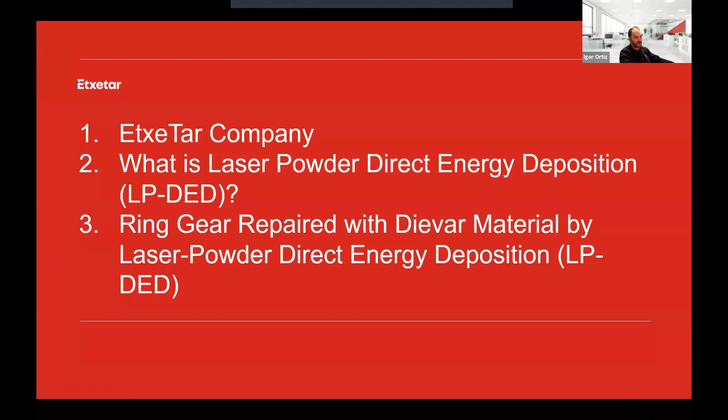This is a group of different companies, but I'm going to focus on just two companies, Etxetar and Ikergune. I belong to both of them. Ikergune develops laser processes, laser powder direct energy deposition processes, systems and technology that is deployed to Etxetar. They develop, commission and design machine tools, in this case for laser powder direct energy deposition processes for specific parts.

We are located in northern Spain, in Basque Country. We have three production facilities, two in a town called Elgoibar that are focused on subtractive processes or common machining of steel and aluminium parts. And we have a new production facility and laboratories specifically for laser powder direct energy deposition processes.

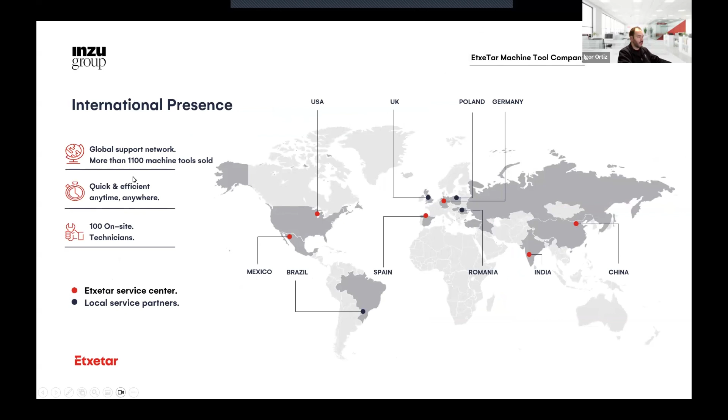We have a global presence. We have offices in Troy, Michigan, for more than 35 years. We have an office and service center in Mexico, in Germany, in India, and in China. The dark blue dots are local partners in these countries that we work with. We have more than 1,100 machines sold. We also have 100 field technicians, and this is our worldwide network.

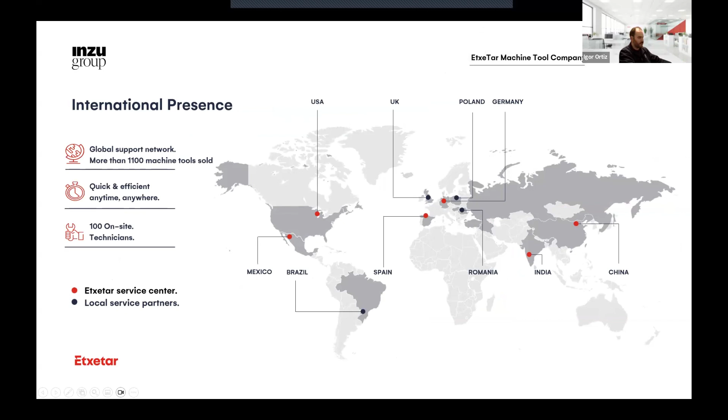Related to laser processes, Etxetar develops three main areas: laser hardening or surface heat treatment with dynamic variable spot shape and controlled energy density, laser cutting, and laser powder direct energy deposition or laser cladding.

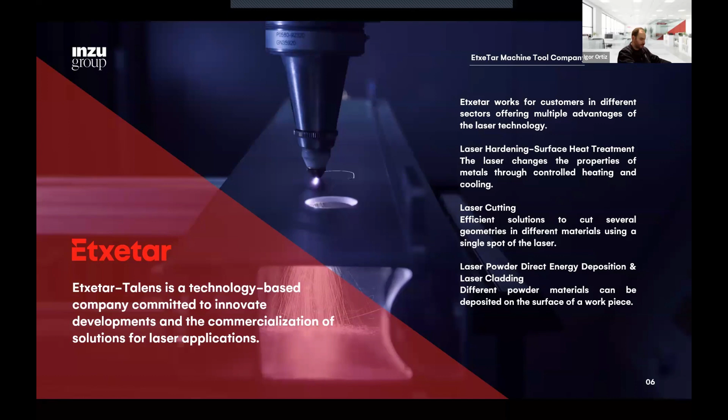So what is laser powder direct energy deposition? We use coaxial nozzles, discrete nozzles, but usually we work with coaxial nozzles that are two nozzles assembled together. Blown powder is injected through the nozzles, and a laser beam melts the powder onto a substrate. During the process there is a heat affected zone and a dilution, but compared to traditional welding, the heat affected zone is small. Also, we can control the track width and height in different materials using thermophysical powder material parameters.

In general, this process or technology is being used for surface improvements, wear resistant coatings, corrosion resistant coatings, and high temperature coatings, and also for repair processes: repair of parts due to wear, repair of parts due to corrosion, and high temperature coatings or parts working in high temperatures. Also, the technology can be used for near net shape manufacturing, for example this 2D geometry done with a CAD model, or for freeform manufacturing.

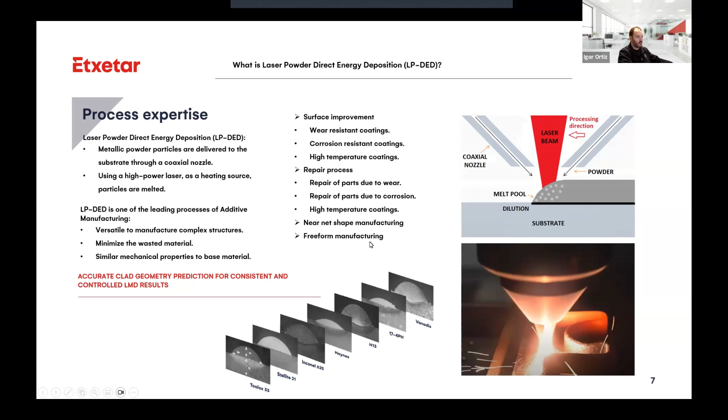So we do a lot of research in powder quality characterization. We look at different suppliers of powder, and we check each supplier and each powder to see if it's a good supplier. We want to avoid porosity in the powder, because in some materials like Inconel 718, this porosity is reflected in the tracks. Even if we have good process parameters, the tracks and the part have porosity, so the part is not suitable for entering service.

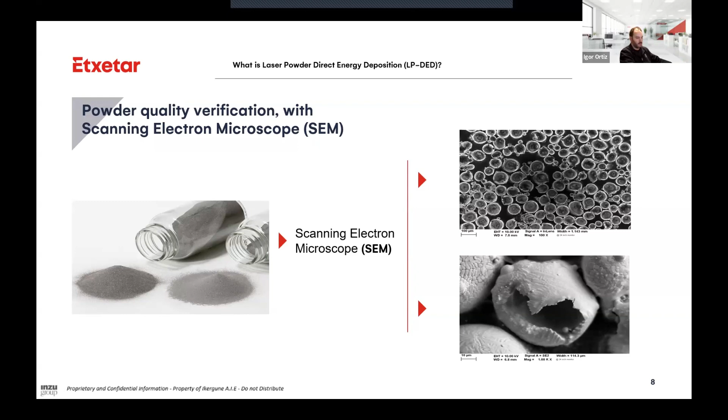We have researched different materials. We research the same material from different suppliers, and also check the quality of the supplier in different substrates, checking dilution, porosity, lack of fusion, and whether the quality is enough for the part itself. We have different powders under research, and other industries like energy, aerospace, naval, and hypersonics can be suitable for additive manufacturing or laser powder DED.

We have researched stainless steels, maraging steels, cobalt-based steels, nickel-based alloys, tool steels, bimaterials, and other high strength and specific powders, always checking the quality of the supplier and the process.

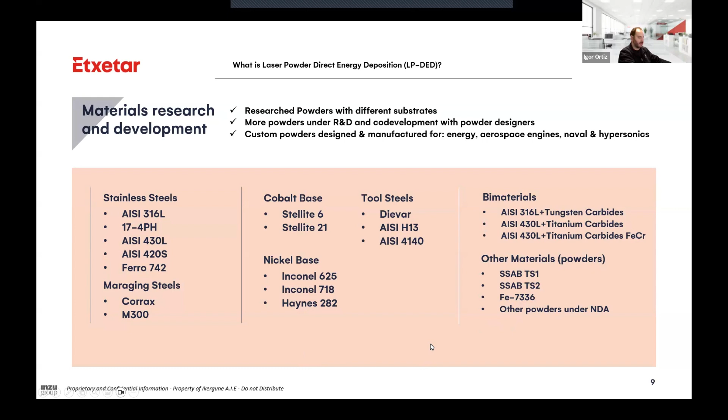We have our own metallurgical laboratories, a specific team that researches the powder, the quality, and the behavior with the laser. We check internally and also for projects and programs the quality that we achieve in our developments, using different tools and systems to check the quality.

How we do our research, or how we characterize the process: we start with simple tracks, selecting a specific powder. In this case, we have selected Dievar material for repairing the ring gear, and we run different tracks with different process parameters.

We check each track in the metallographic laboratory for porosity, lack of fusion, or any issues in the quality of the tracks. Once we have the height and width of the track, we select one track and its linked process parameters.

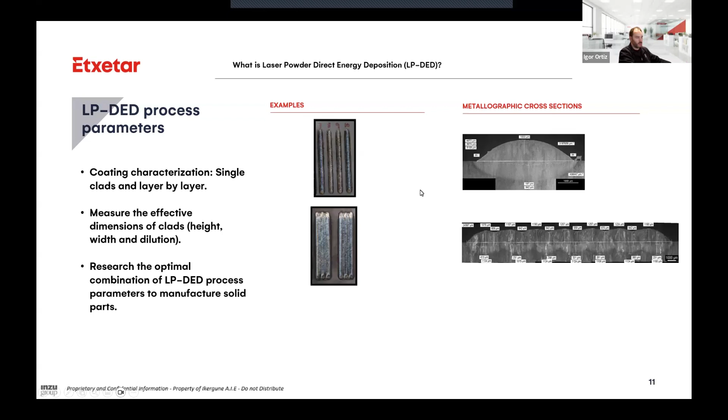We launch one layer coating and five layers in a prism or near net shape geometry, checking the dilution, porosity, lack of fusion, cracks, and any issues we can have in the single layer coating or the multi-layer prism.

Once we have checked the quality of the substrate with the powder in these three cases, we have a process recipe, which we save internally and also to our laser software for toolpath programming.

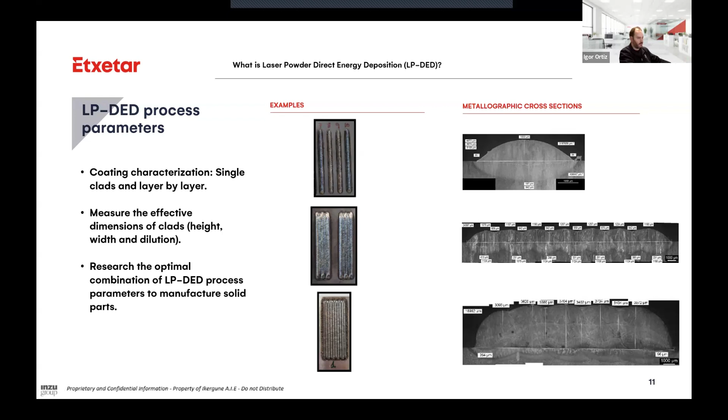In parallel or afterward, we check the as-built samples via cross section, using optical microscopy to look for any crack, lack of fusion, cross contamination of the powder, and porosity, assessing the behavior of the powder with the laser parameters in all our research.

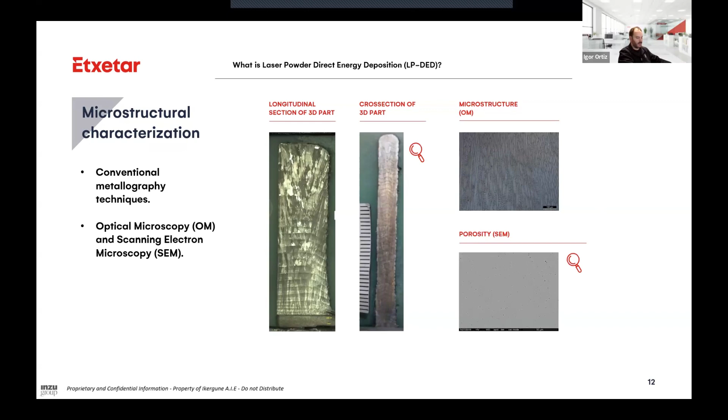We have made 4 blocks of AISI 316L. On one hand, checking 24 hours non-stop processing with a high power laser, demonstrating that we are capable of manufacturing and that the system is stable during a 24-hour non-stop process. We have commissioned the system and it works for long times, including the optics, cooling system, laser source, nozzles, and every item and tool involved in the laser powder DED process.

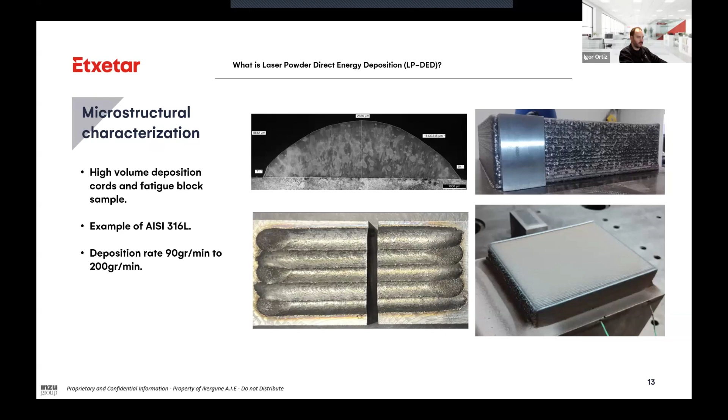In parallel, these 4 blocks have been used for taking samples for stress strain and fatigue curves that we are measuring in different materials, in this case AISI 316L.

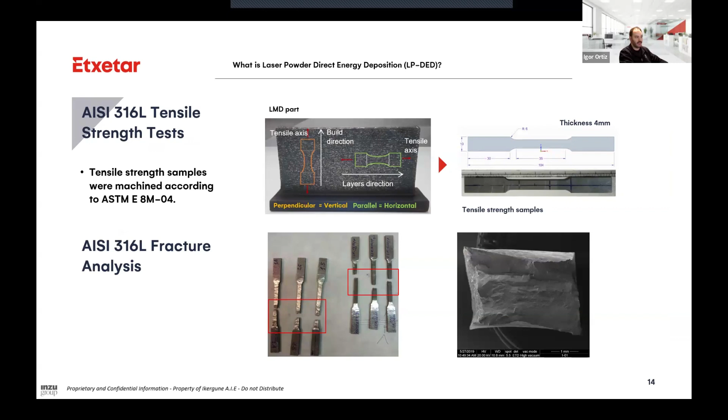Now I'm going to show two part samples that we have worked with in laser powder DED. One part is a wind power main shaft repair, where we had to preheat the material, 42CrMo4, to avoid cracks with the powder being cladded, in this case Inconel 625. Without preheating, the 42CrMo4 material can develop cracks during the process.

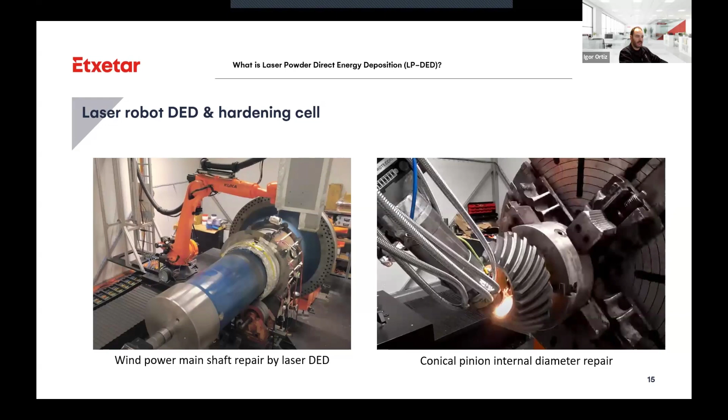Another type of part we have repaired, developing the process with one of our customers, is the internal repair of a conical pinion. Currently, different types of shafts and conical pinions are returning to service after this repair process.

Our goal with Penn State University's Gear Research Institute, with Aaron and his team, is to develop know-how on the fatigue behavior of gears loaded with different loads, and to use this information. Our goal is to repair, coat, and manufacture gears or gear teeth by laser powder direct energy deposition.

This gear is an example of toolpath programming, showing that we are able to control the toolpaths, the powder, and the material to build near net shape gear tooth geometries. From the Gear Research Institute, we are taking the fatigue curves in Dievar material.

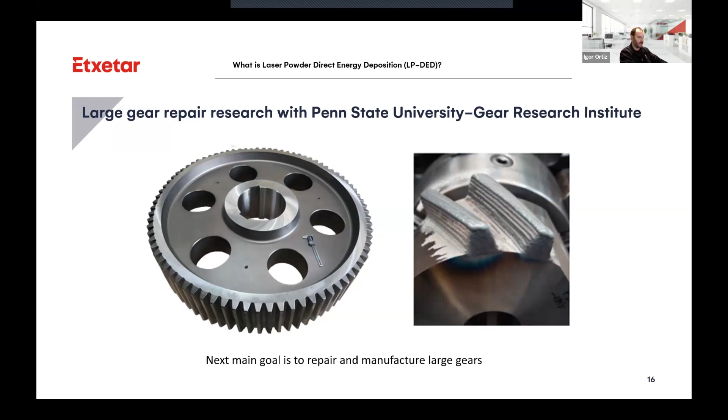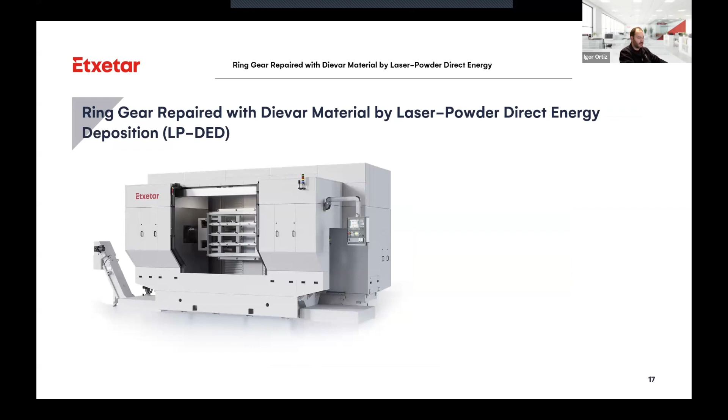So this is our case: an X-Flex machine tool from Etxetar. This machine tool has 6 spindles. The part that has been broken is a geared ring that moves this spindle horizontally.

The gear ring was broken due to a shipment issue from a supplier. There were just two possibilities: to manufacture a new ring gear or to repair the damaged gear teeth by laser powder DED.

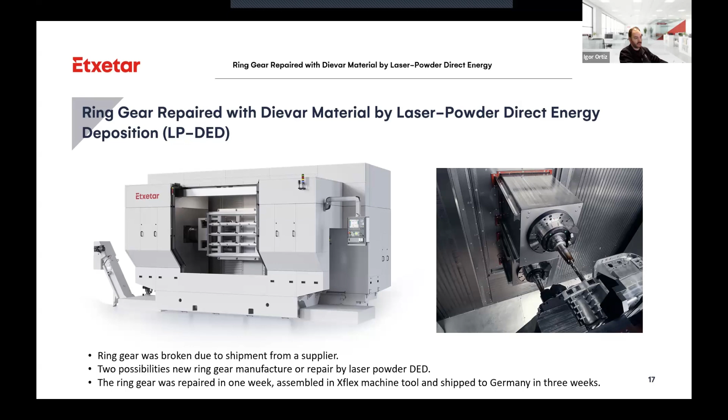Internally, Etxetar told us to repair by laser powder direct energy deposition. So we take the gear, because this gear, or this machine tool, has to be shipped to Germany in 3 weeks.

This is the damaged ring gear. I can't show the drawing, but the dimensions are between 700 and 800 millimeters in diameter. This is a broken tooth in the gears due to the shipment that has been broken.

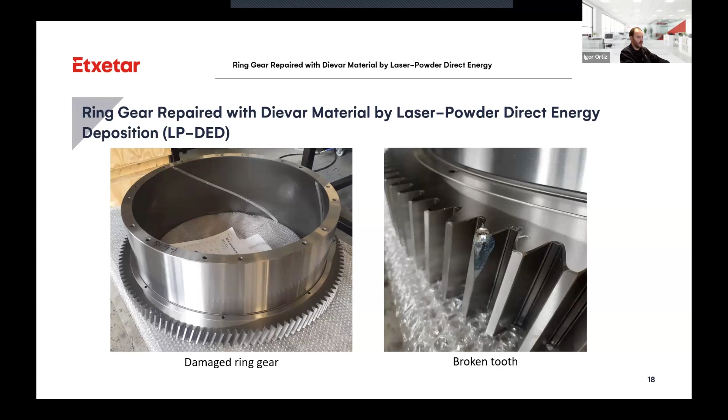To take the repair process with laser DED, we previously studied the material behavior with Dievar, and did some preparation, and we have been talking with Aaron about whether this root area can be affected by the heat affected zone from the laser input. So we have done some tests with the toolpaths, also developing new process parameters with Dievar material.

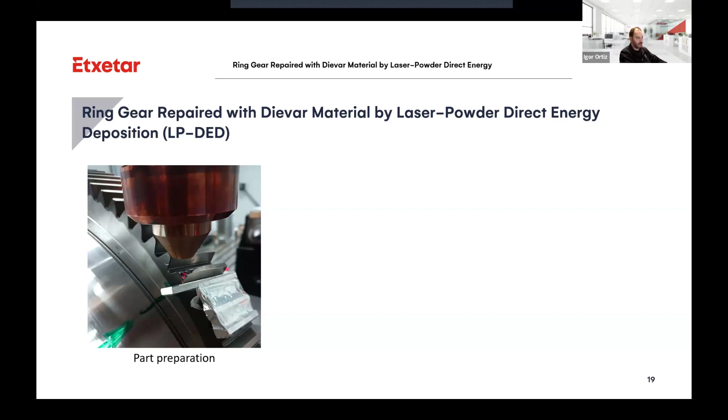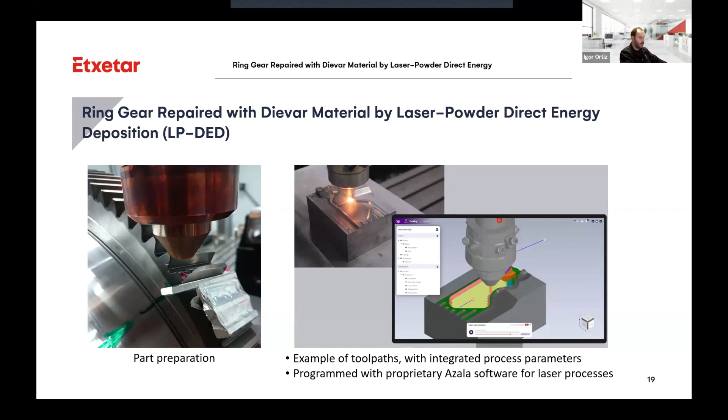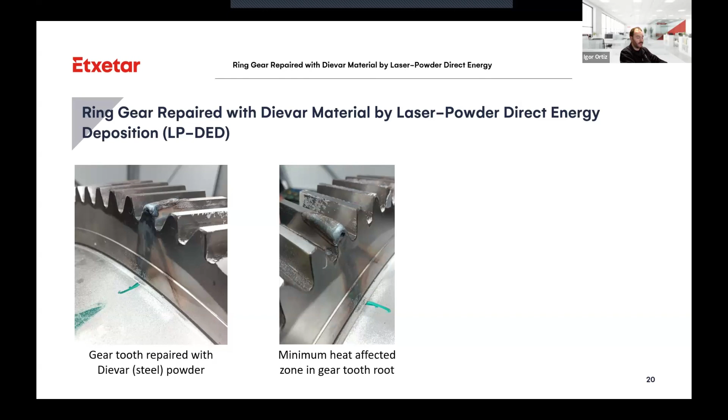We have programmed the process parameters, uploaded them in our software, and developed the repair process of the gear tooth with the toolpaths that were previously programmed. This is one tooth that has been repaired. We took into account to minimally affect the root of the gear tooth, and these are some examples of the repaired gear tooth.

The material used is Dievar powder. It's a high strength steel. We used this material because, as I mentioned before, the powder comes without porosity. It has a hardness between 52 and 58 Rockwell C, so high hardness for a gear tooth.

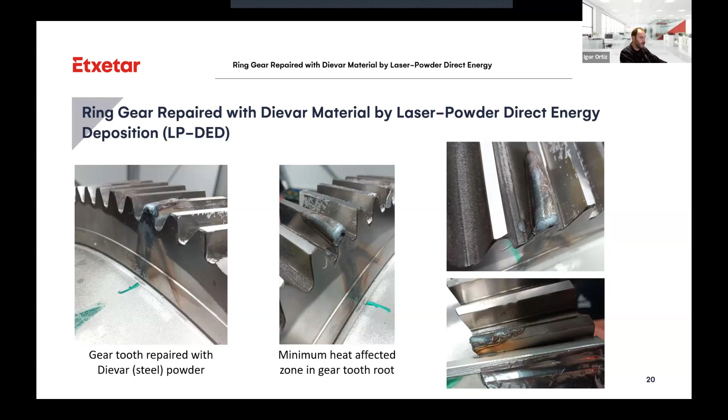In parallel, Aaron has taken the data of fatigue curves of the Dievar, so it's working well in different loads. We have taken the measures of a sample of a whole manufactured gear tooth by laser powder direct energy deposition. As you can see, no lack of fusion, zero porosity. The small points represent the hardness in these areas.

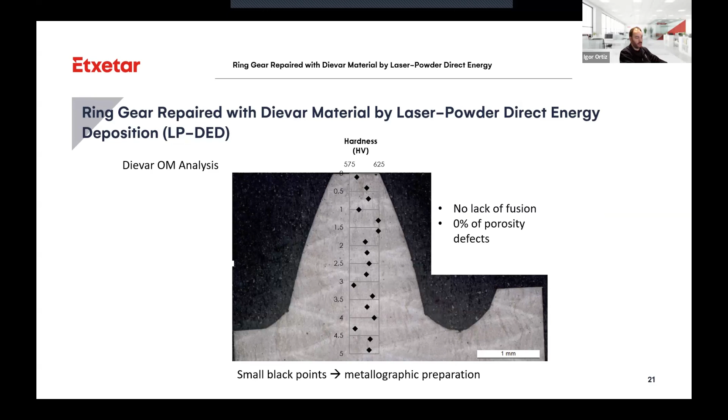So we have done different analysis, not just the repair, just building sample tools. Finally, I can show you the repaired gear teeth and grinded gear teeth, because Etxetar guys were in a hurry and had to ship this machine tool to Germany in 3 weeks to commission it and get it running manufacturing. The gear ring is assembled in this area that moves the spindle head.

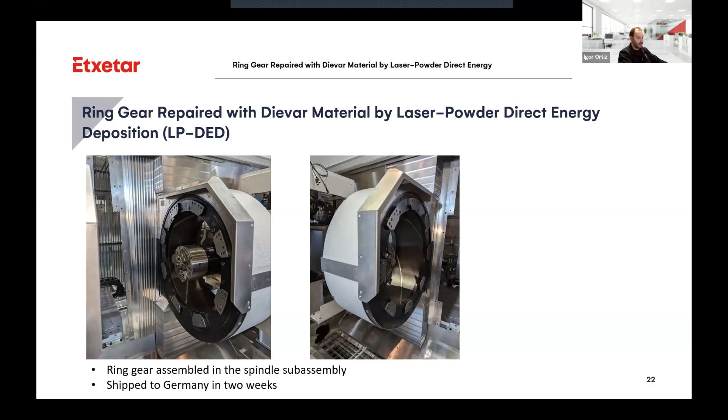And finally, it's assembled, it's commissioned, and it's running. I haven't gotten any phone calls, so I think it's working.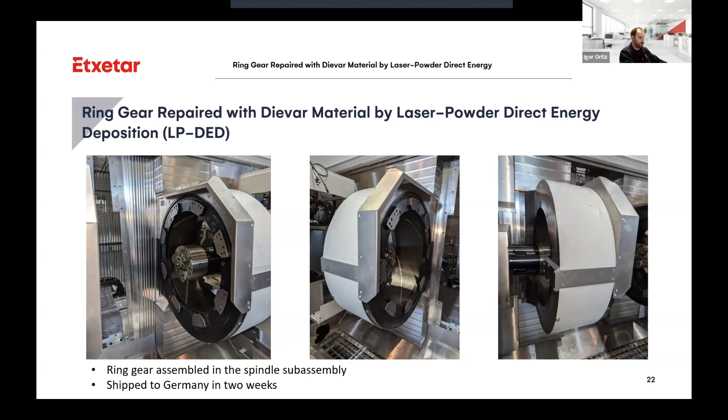Thanks so much. Are there any questions right now for Igor? You can feel free to unmute yourself if you'd like to ask him a direct question. Mary Ellen, I'm sorry, there was one in the chat, if you'd like to read that off. I'm sorry for interrupting. No, thank you.

From Mike Z: what type of hardening method was the original part? Was it carburized, nitrided, or through hardened? Carburized. The original ring gear was carburized.

Mike Z, do you have a follow-up to that, or are you good? My question would be, is there any kind of delineation between the material you added and the parent material? Do you see any kind of a transition or any kind of a spike in hardness in that area?

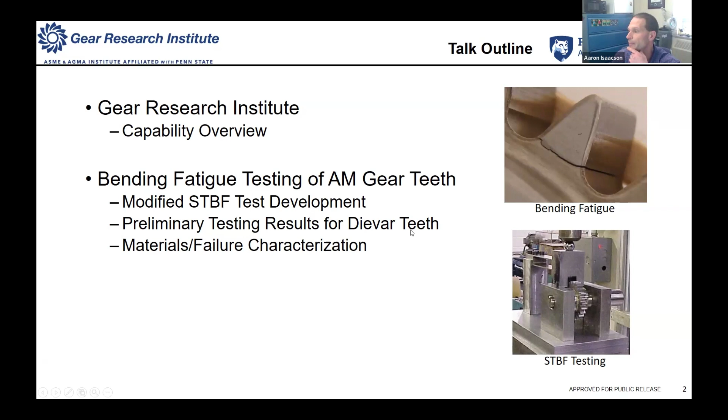Here's an image of sort of conventional bending fatigue testing, or single tooth bending fatigue, which is what we do a lot of. But in the case of additively manufactured gears, in one specific example, we needed to really tweak what we do to evaluate bending fatigue strength for AM parts. So I'll give you a little overview there, and then finally we'll get into some results with the Dievar gear teeth that Igor was using for repair.

Okay, so some background on GRI. GRI is an independent nonprofit corporation that's managed by Penn State, the Applied Research Lab, and GRI has a board of trustees made up of folks from around the gear industry, appointed by AGMA, ASME, and also elected by the Gear Research membership.

One of the things that really makes Gear Research attractive for both consortium and single client type research projects and testing efforts for companies is that we have a management agreement between GRI and Penn State that allows us to accept intellectual property and NDAs and things like that with companies, which traditionally is difficult for universities, because universities like to own everything.

Our mission, again, was established in the early 1980s to be a resource for the gear industry. We want to provide a mechanism to cost effectively and quickly perform R&D and testing efforts that are maybe kind of on a middle scale, not necessarily full scale. We don't have large helicopter drive system or wind turbine drive system test beds here, but we do have a lot of testing between coupon and full scale type.

We do a lot of, you'll see on my next slide, production part or component testing, but not necessarily full system testing. So again, we're a resource that's here to help drive new technologies forward.

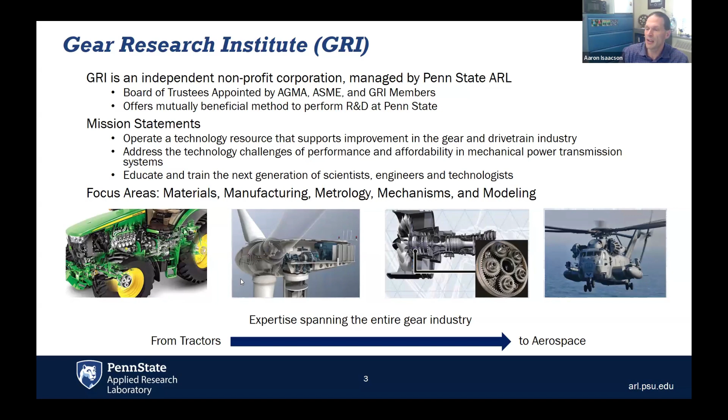Our focus areas really are not limited to these things, but it's anything involving power transmission, gearing, or drive systems. We have never said no if somebody comes and asks for help trying to solve a problem in this area. So I like to say, from tractors to aerospace, and even beyond, is our customer base. I kind of boiled down about 50 slides of what we do into one here.

Again, it really comes down to conducting controlled gear failure testing, which there are a handful of folks that do. But we try to work with our customers to meet their needs and adapt maybe one of our typical standard type tests to something which solves the problem cost effectively for the customer.

So you'll see an example of that today with the AM testing. We've developed new types of testing for reversible bending fatigue testing, for idler and planetary type gearing. We've done a lot of production part testing in cases where that's required. And that's one of the things that really sets us apart from other folks that do gear performance testing - if you want to test the bending fatigue of your spiral bevel gear out of your helicopter gearbox, we can do that. We can design test hardware and make sure you get the type of data you want.

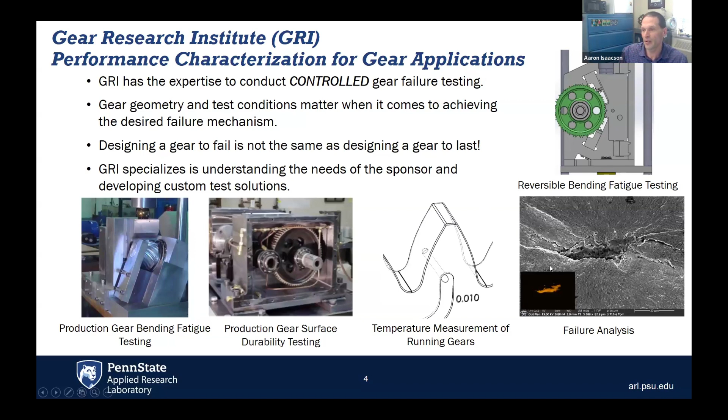Again, we do everything from conceptualizing the test to failure analysis, metallurgical consultation, and things along that line. Okay, so enough about us.

What we did for the Etxetar group and Igor's group was—let me start a little earlier. We started working with Igor maybe two and a half years ago. But prior to that, we did some work characterizing performance of additively manufactured gears. Don't let the first images scare you too far, but we had a project back in 2017 where we were supposed to receive gears that look like the lower left here.

This is a 3.5-inch pitch diameter spur gear that's kind of one of our standard test gears for a lot of different things. We chose it because it was reasonably small with a narrow face width, so it would be low cost, low build time for an additive manufacturing evaluation project.

The parts were very delayed. We came to within about two weeks of the project end date, and I got a call from a sponsor saying, we can't get you gears. All of our gears keep cracking during building, during cooling, during subsequent processing as we're trying to build them. So what we've been able to do is build some teeth. What showed up were these bags of very straight-sided single teeth, and they said, we want you to test these.

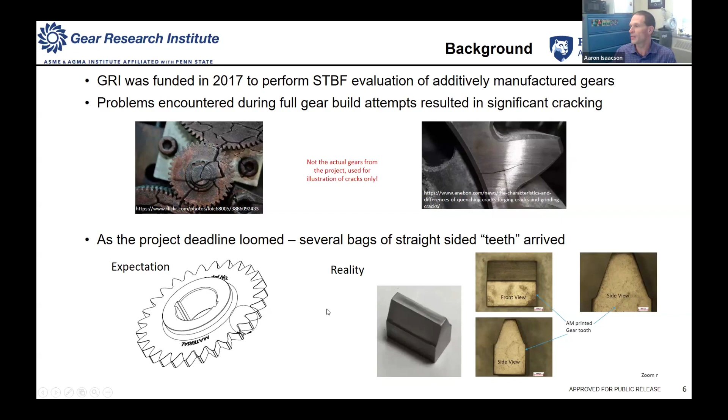I'm not sure exactly what they thought, but we use a test fixture, shown on an earlier slide, for our single tooth bending fatigue testing that relies on an entire gear. Our loading arrangement looks something like this: the bits of the fixture are removed, but we're applying a load and a reaction force to two different teeth—a controlled force to a point—and we rely on the gear body to transmit forces and hold the part. So if you're just giving me this single-sided, straight-sided rack tooth thing with no real reference surfaces, it makes our job a little more difficult.

So we needed a bit of an extension, but we had to modify our test fixture and come up with a way to test this. Here you can see an as-printed tooth form that we needed to test in bending fatigue. What we don't like about this straight-sided thing is that it makes it difficult for us to apply a load using our standard tooling, which we like to keep simple.

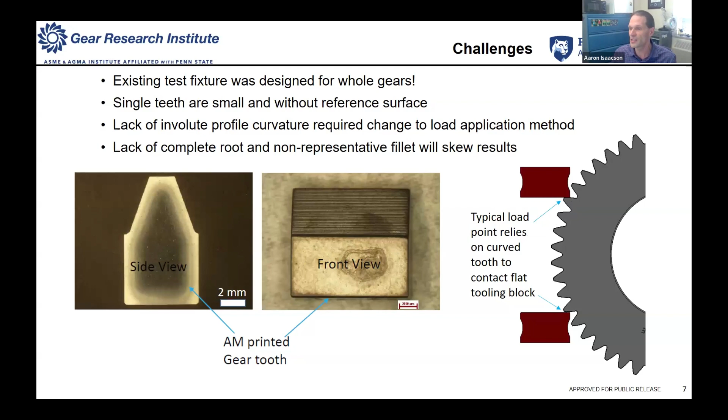On a normal single tooth bending fatigue test, we rely on the curvature of the gear tooth—the involute curvature—to give us a nice elliptical, rectangular contact across the tooth, which we contact with a flat piece of tooling. So we're using the curvature of the tooth to allow us simple tooling that's cheap and easy to make and set up. We also like, in order to actually compute bending stress, to have something that resembles a root fillet shape on a gear tooth, which here we don't necessarily have. If you compare this to real gear tooth geometry, we have more of something you can use an established calculation method on to compute bending stress, where here we don't necessarily have that.

So our solution, going back almost 10 years now, was to take another gear geometry that we had testing tooling for in the single tooth bending fatigue test, with some experience, and create something more representative of a real gear—something we could load with a similar methodology, where we have curvature of the tooth and a root fillet geometry so we can compute bending stress. We also had to establish some datum surfaces so we could locate, clamp, and hold the part reliably, minimizing labor from changing the tooth each time.

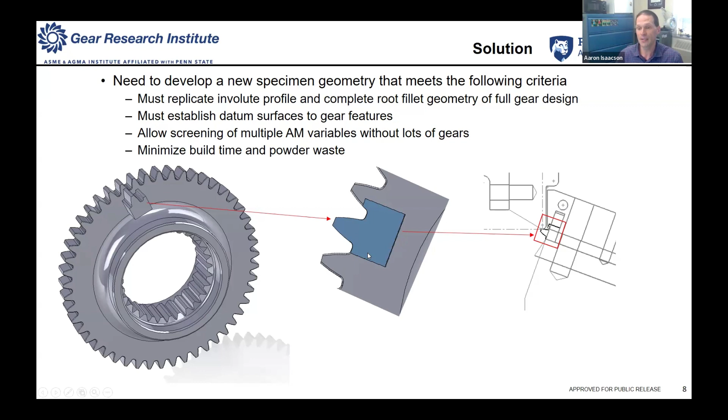So these folks not only have material, but all these other things that influence microstructure, residual stress, and so on. That makes it desirable to maybe only print a handful as a screening exercise—let's print 5 or 6, test those, and then we can make more or make adjustments as needed.

The real goal here is that many people are building and printing metal parts, specifically gear teeth, but we don't really know what's the strength—what's the design allowable? How do we design a part? How big does it have to be to carry a load? We don't have that fatigue strength design allowable that we need.

So this is a start to that effort—let's develop a library to give us design allowables or some guidance to make real parts with these materials and manufacturing methods.

Here's what Igor's company decided to do. They've done this two different ways, and he can answer questions about which they prefer and why—two different geometries of parts. They built up a block of the Dievar material, and this one was more about machining the teeth out, eventually cutting them off of this substrate.

Then the next mode—there were some issues here with machining. I think there were some sharp edges; I remember in one of Igor's slides he showed a cross section of a tooth with some very sharp edges in the root fillet, which wouldn't be good for fatigue. So when I first saw those, we decided to change that before we tested them.

We actually utilized a wire cut, an EDM cut form for the geometry here. Again, this was sort of a first crack at this—how do we get these to work and see if we get good fatigue results from this. And this was the way to make it.

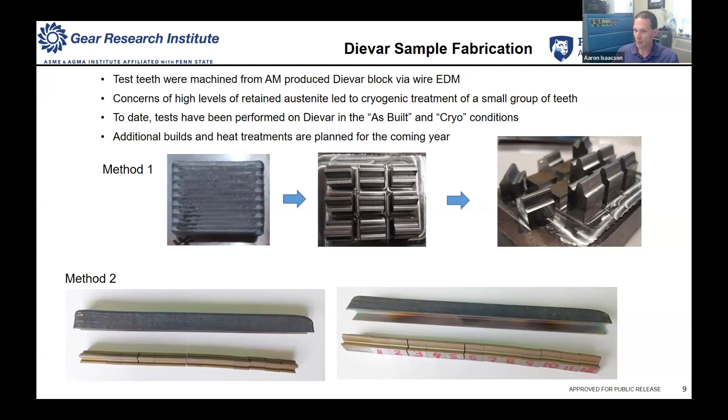So we're still continuing to do this, and you'll see probably the final results published in some sort of paper at some point in the coming 6 months to a year.

Okay, so now we have parts made. We've made our little single tooth or 1.5 tooth test specimen, and you can see it's mounted in the fixture with our loading anvil removed. Typically we'll put it in there, make sure everything looks good. It's captured on the bottom, the backside, and the top. The sides aren't necessarily contacting, so it's free to float left to right. But we're supporting it on the bottom, and our loading is horizontal, so it can move left to right without influencing anything.

We check our contact pattern. Here you can see most of the face width of a tooth. We'll put layout bluing on it while it's in the fixture, then apply several cycles of load to make a pattern. Again, you can see what it looks like - very much a line contact across, as you'd expect from a flat piece of tooling contacting that. We can use these measurements, and we can tweak it by shimming things up and down to control where it contacts. We take this number and put it into our bending stress calculation so we can compute actual bending stress based on the point we're applying the load.

So for the test, we're applying our sinusoidal load as we would in any single tooth bending fatigue test. Most of these are done at about 50 hertz. We use a stress reversal ratio, or R value, of 0.1 - that's the ratio of minimum to maximum load, 10%. Our run out limit for this project, as with most of our projects, is 10 million cycles. Here you can see what a broken sample looks like, with the contact pattern after a full test.

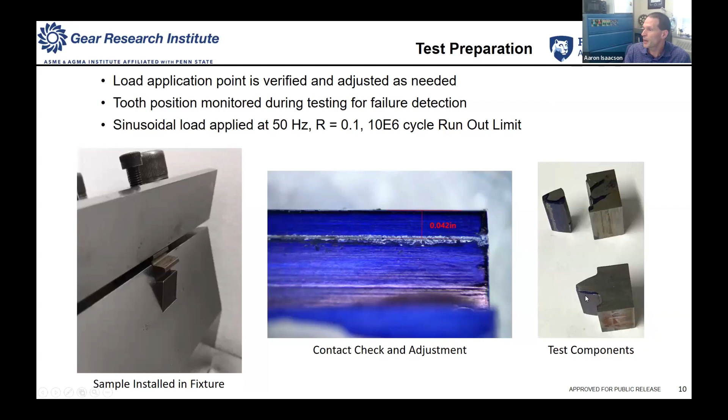That must have been one of the first ones with the bluing on. And then this is one that didn't fail, or was a run out - that's what we call a sample that exceeds 10 million cycles without cracking or failure. I think that's about all I have to say about that.

Here's the data. All of these are bending fatigue failures. I've presented this in terms of maximum applied load right now, not bending stress - that's coming. But what I need to do yet is verify the root fillet radius, and maybe even measure strain, since this is sort of a new thing for us. I want to make sure before I publish or provide stress numbers that they're good and accurate, and that the root fillet geometry and radius is exactly what I think it is.

I also want to make sure the load application lines and the component going in are correct. I want to make sure I give good data, so that's yet to be done, but it will be done shortly. Once it's done, we're happy to share this data on a stress basis.

I realize pounds of force doesn't help folks a lot, but I'm going to show you some micro hardness and hardness data shortly. What I can say is the data here is comparable to other things we've tested of this geometry and similar hardness. It was surprising to me, and to Igor, when we first started, that this material did as well as it did. We're encouraged that we're in the same load range as wrought materials of the same hardness, which is in that middle to high 50s Rockwell C range.

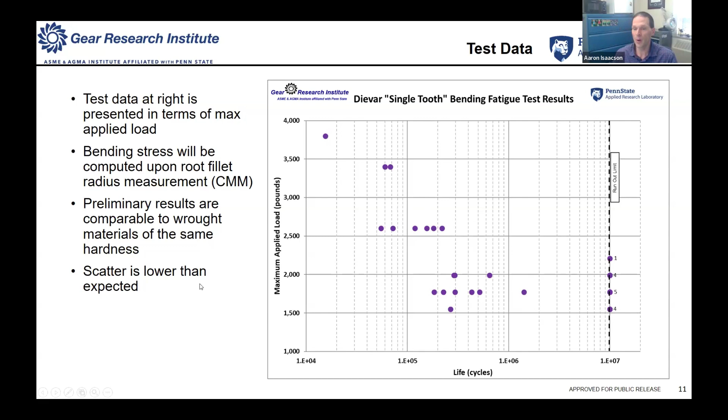We're able to get runouts. Sometimes with really dirty materials or materials with a lot of imperfections, it's difficult to get something to last 10 million cycles because if there's porosity in there, you've got a lot of fatigue initiation sites. With some other AM things I've tested, the finite life portion of the SN curve tends to extend further and may never hit a knee where it transitions toward an endurance limit. We didn't run these beyond 10 million cycles, but for a traditional SN curve you can envision a finite life portion, then a knee, then a run out or infinite life portion. We'll perform some statistical analysis and try to create an SN curve as best we can with this data, with some big error bands since we need a lot more testing. But this is better than what we had so far, which was nothing.

Back to the test development - as we always do in any single tooth bending fatigue test program, we look at our fracture surfaces. Initially just quickly under light microscopy - these are SEM shots since I didn't have light microscope images saved - to see where our fatigue origin sites are. Do they look normal, and are they not at the edge break or edge of the tooth, which would indicate a fixturing or load application problem, like twisting or applying heavier load on one side versus the other.

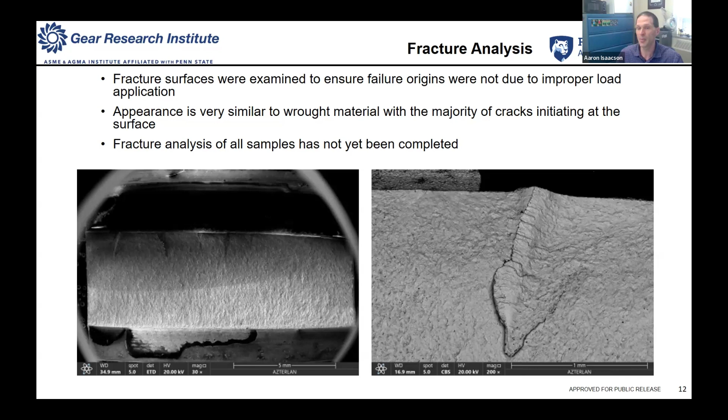It's difficult to see, but you can read the witness marks here - the origin site in this one is over here somewhere, and this one's right here. Again, they're at or very near the surface in both cases, which is good for the AM material - we're not seeing a lot of porosity or voids contributing to failure. I was very skeptical, and I'm still impressed at how well this did. It's not surprising to hear that a repair with this material, if the heat affected zone challenge has been overcome, is strong enough in the as-deposited condition to carry some loads.

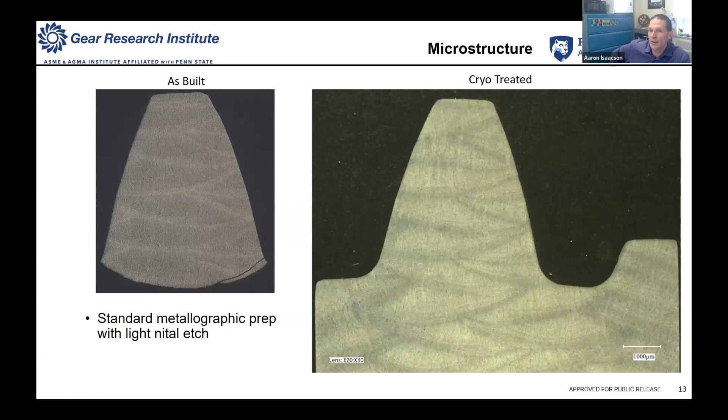These are loaded from the right flank here to the left, under tension. This one is a run out and did not crack. This one was a failure, and the crack initiated, I believe, over on this side - I'd have to double check that, but I'm pretty confident, unless it was reversed. So this is being investigated as well. More to come on this when we put together a paper that covers it a bit more thoroughly.

We're in that middle 57-ish range in Rockwell C. Now, these are not post-process. This is as-built, again, with the exception of the cryo treatment, which didn't really appear to change anything.

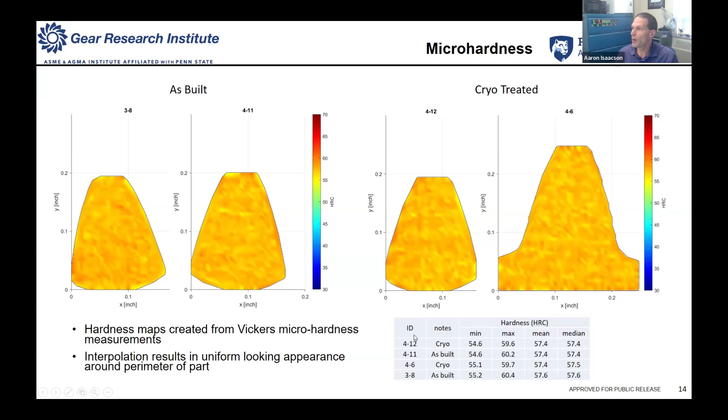Looking at the microstructure, I don't believe we had a lot of retained austenite, but we'll continue to look at that at higher magnification, and whether we do X-ray work to measure that, I'm not sure. That's really all I have.

Again, that's the test method. I think we feel pretty good about it. We're getting failures that look like they should in bending fatigue. We've been able to do that using the small coupon we've developed. It's more like a gear tooth than what the non-gear people came up with, a straight-sided thing without a root fillet.

And we're starting to build this Dievar data set, and hope to understand that a bit more. But I think there's a lot of room for cost-effective material property development for additional materials or other types of fabrication of the same material. So there's a lot yet to be done, but I think we're positioned well now to assist the industry with that. So, that's all I have. We'll take some questions if anyone has any.

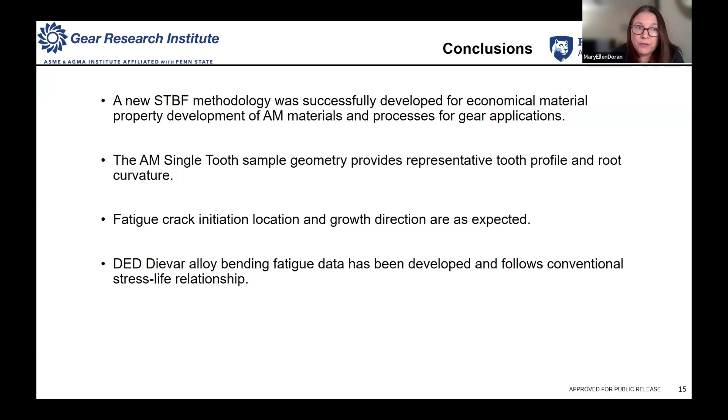Aaron, this is really terrific, and it's been a long time coming. You've presented to our group for a while now, so this is really good information. Thank you. We have several questions to go over for both of you, so however you guys want to handle the questions is great.

Our first question is from Sapradeep. How do you generate the path for the DED deposition head in order to repair the gear?

We have developed our own software for laser processes. We started in laser hardening, and now we've developed it for the laser powder DED process. The system mathematically controls the track overlap to avoid lack of fusion between track overlaps and also in height. And in parallel, we save the process parameter data that we research with a specific substrate and powder.

So the software automates the repair processes. We can scan the part with reverse engineering, take the point cloud, compare it with the nominal CAD data, and launch the toolpath. In this case, it's not necessary—we have mapped the points of the toolpath with teach mode on the customer's robot cell.

Thank you. Graham Loney asks about cost. Generally, how much does a repair like this cost, and is there an economic benefit to repairing multiple teeth versus replacement of the component if delivery is not an issue? I think he just wants general information.